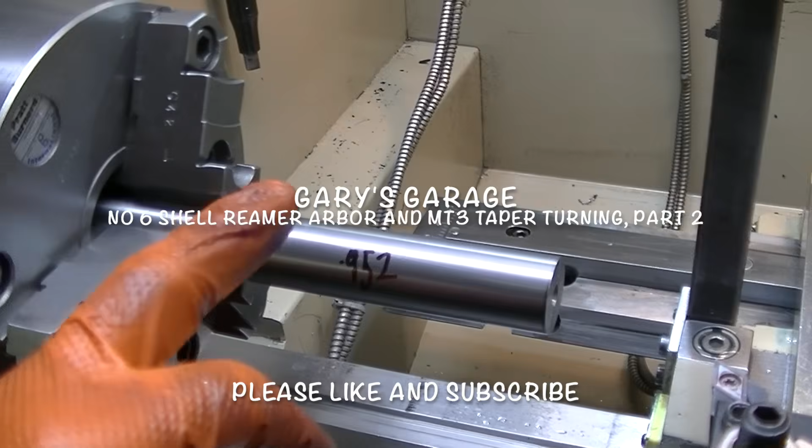Alright, we're back at the lathe now to turn the MT3 taper for this shell reamer shank.

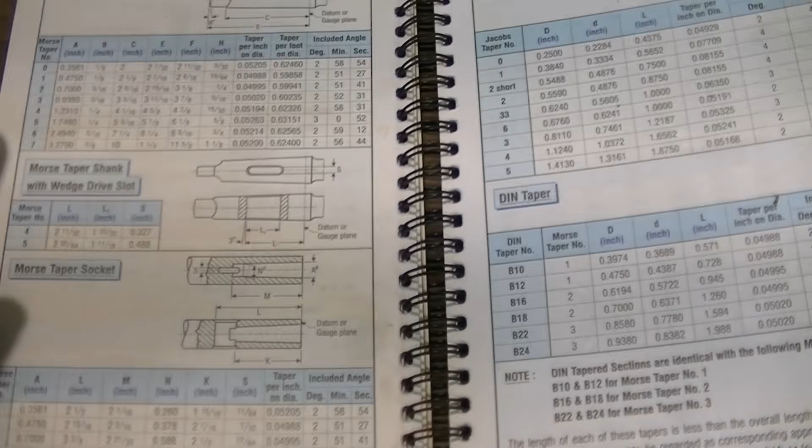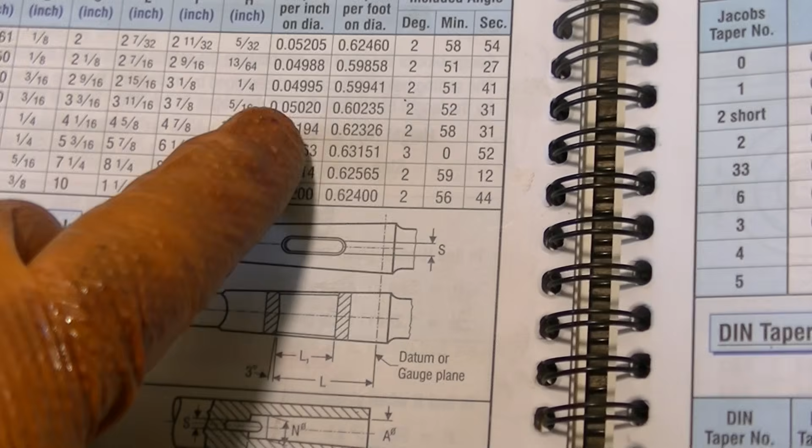Okay, so I think the way to do this is I'm looking up the MT3 taper in the engineering black book, which is like a machinery's handbook but just a condensed version of it. I'm looking at number 3 here, Morse taper 3, and I look over the taper per inch on diameter. I think that's the right number, I'm not sure. It's 50 thou and 2/10.

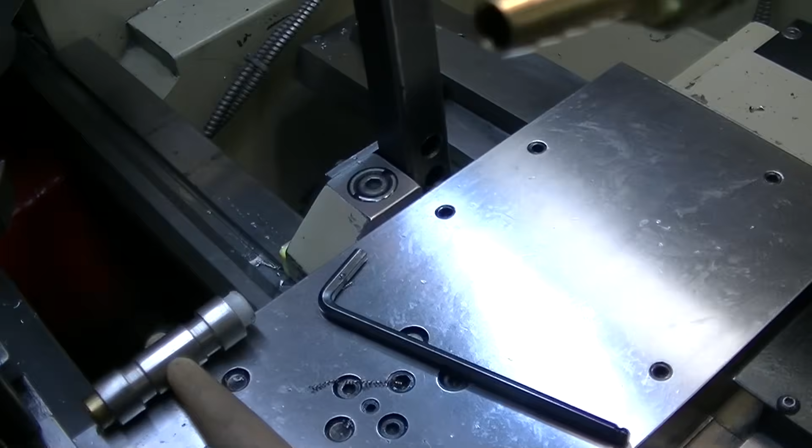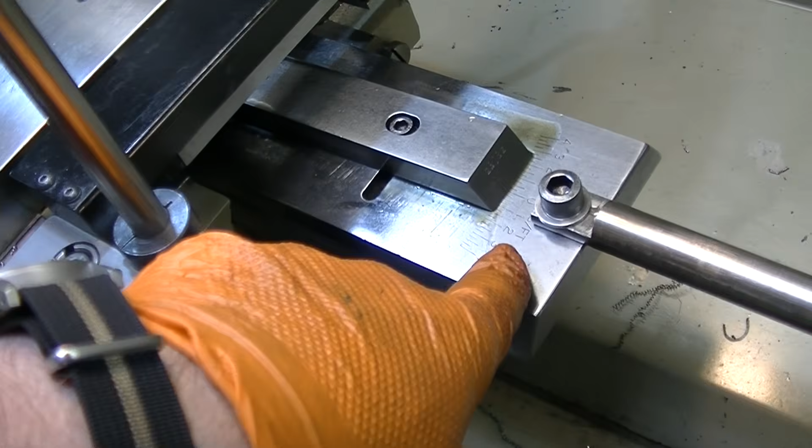So we're going to go over here. The taper attachment is installed. Well, the taper attachment stays installed permanently, but I just set up the tail part of the attachment right there. And I'll move over the cross slide here. I set the angle basically approximately based on the inches per foot. This is just very approximate.

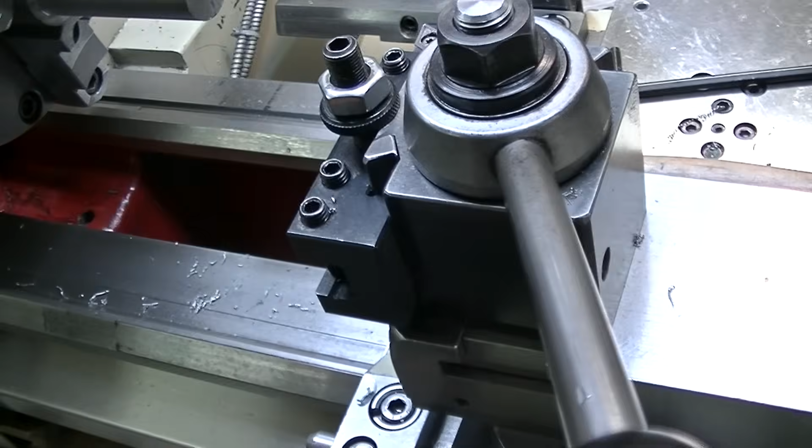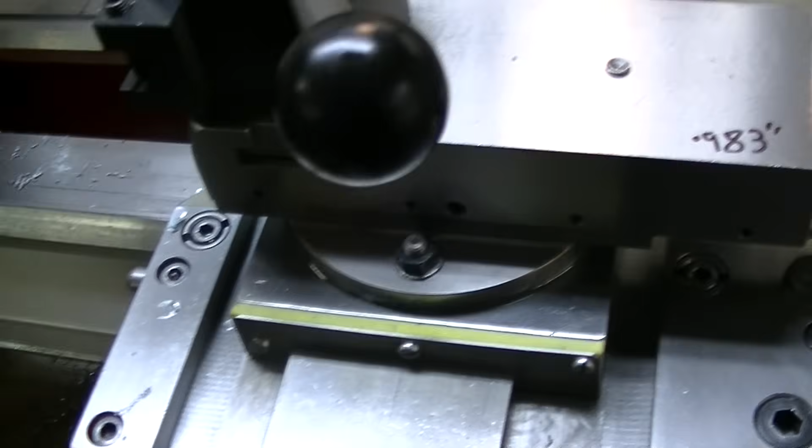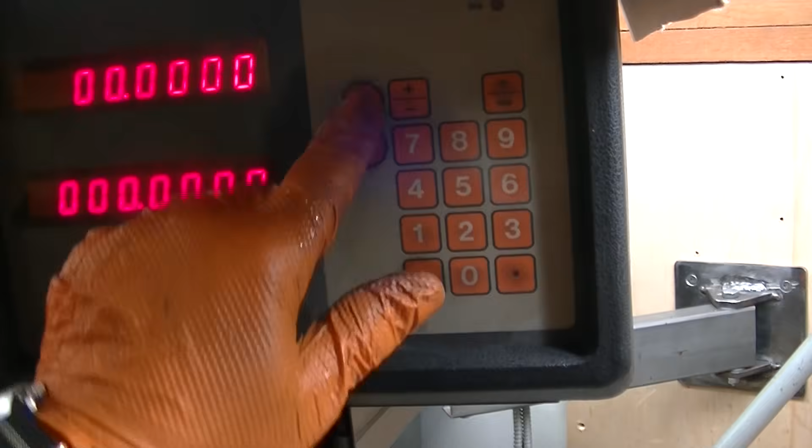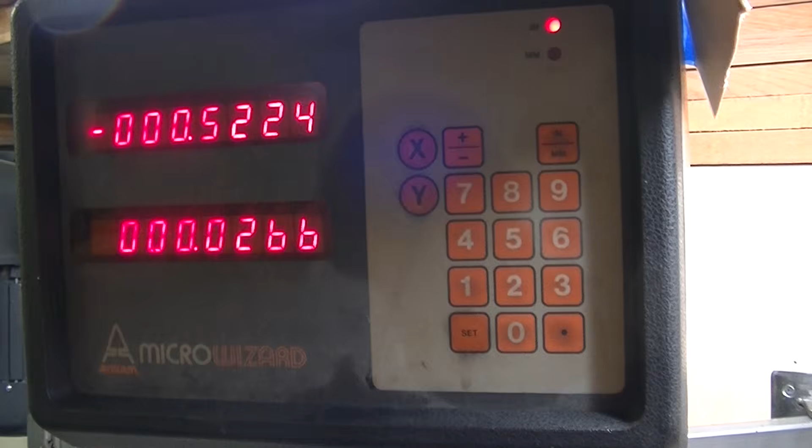And then to get it as close as possible, at least with this machine, I use the DRO, and what I'll do is I'll take the backlash out of the taper attachment. There's a lot of backlash in a taper attachment, which is quite normal. So I move the cross slide over, and I move the X 2 or 3 inches, and then what I do, I zero the DRO, and see if I can do 3 things at the same time here. I'm going to advance X by exactly an inch, and hopefully the Y, I know it's reversed, but hopefully the Y is at 50 thou.

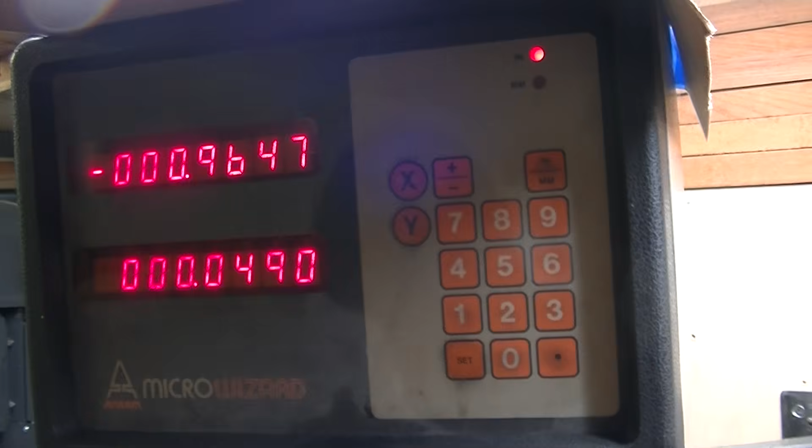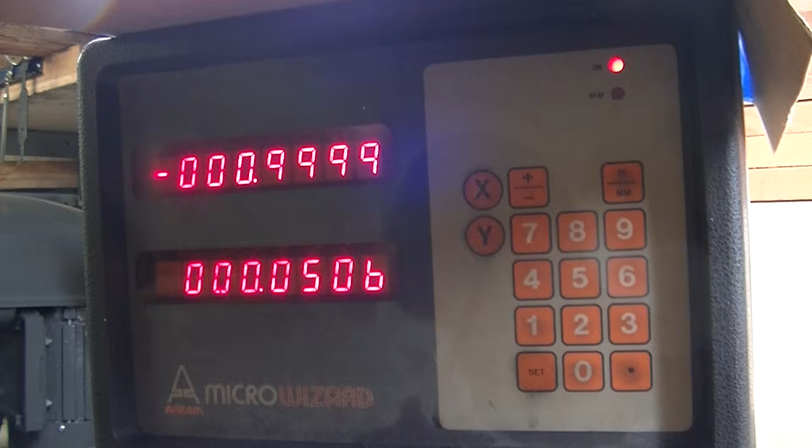So let's see... and there we are, 50 thou and 6/10. So that's as good as you're going to get on a taper attachment like this.

So what I'm going to do is set the camera down and start taking some cuts on a test piece right here, and get a rough idea to see if it's cutting correctly. Okay, let's see if you can see anything here. Get this fired up.

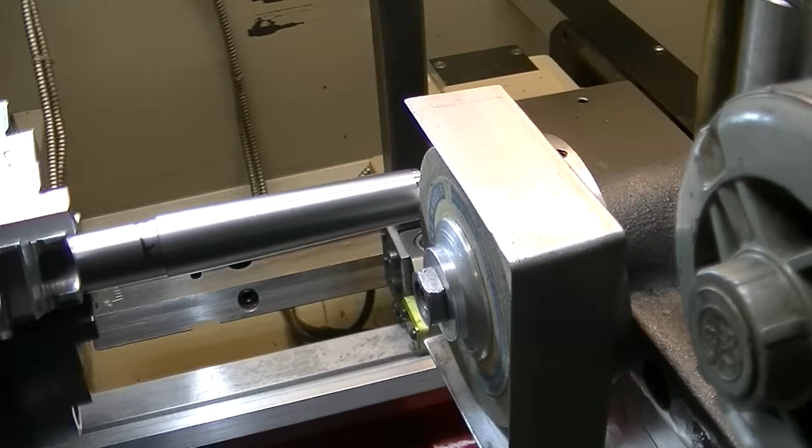Alright, good morning everybody. Back at the lathe here. So I had finished off yesterday by turning down the MT3 shaft, and I thought I just hit it bang on or just slightly under.

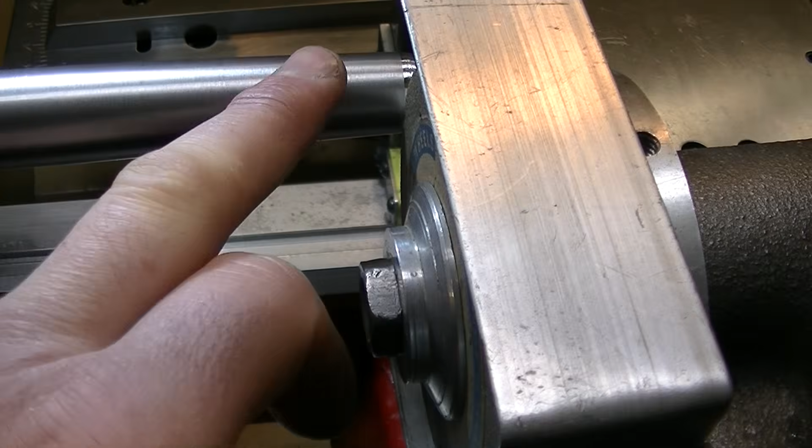Well, it turns out when I slid it into the tailstock over there, looks like I do have a smidgen left. I can't measure because it's taper, but I can grind just a little bit off to make it a perfect fit. So I'm happy about that.

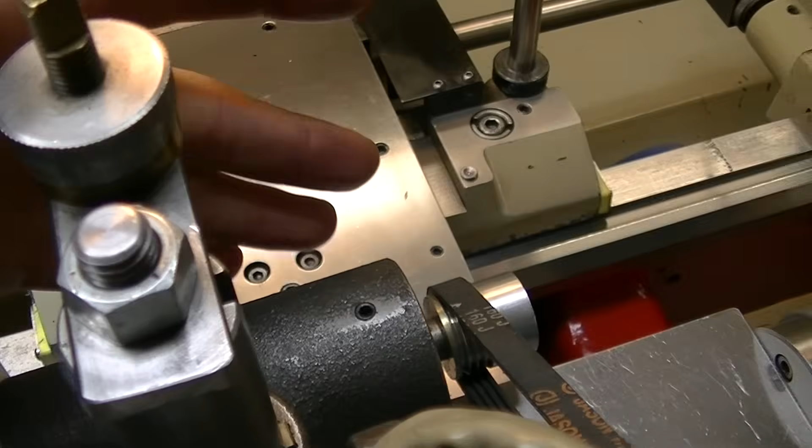The only thing I'm not happy about is because this is on a taper, the tool post grinder is also following that taper, and the barrel of the tool post spindle interferes now with this side of the tailstock, so I cannot support the end of my shaft here. Now I've got a roughly 4-inch extension. That's not really good. So I think the finish won't be as nice as it could be.

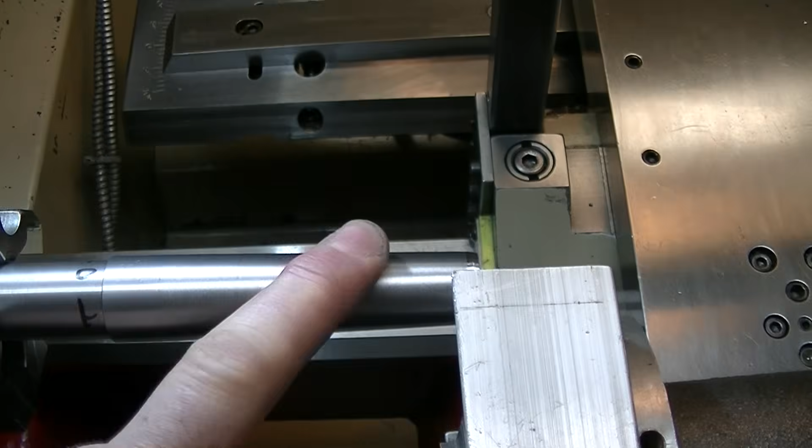But do I go with it? Yeah, sure, I'm going to give it a try anyway. So I'll set you up here and see what happens.

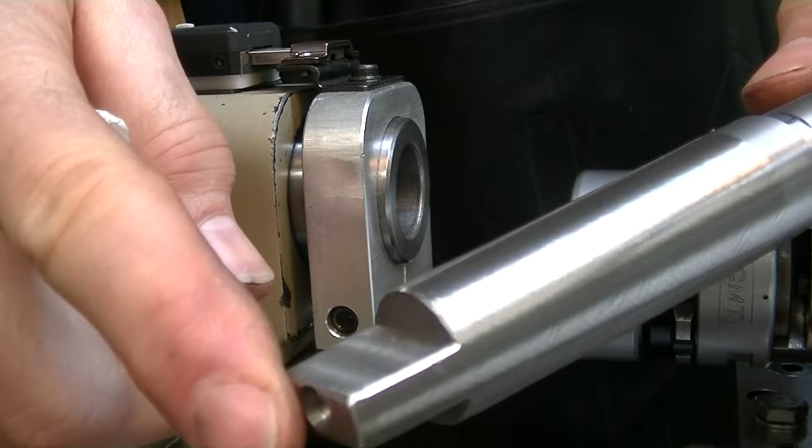Okay, back here, got a tang milled on there. I just copied a drill bit, and it looks like it's correct. So when I stick it in here, if I rotate it, I should find where it locates, and okay, it locates right there, but it doesn't go very deep, which means I can still grind material off, which is good.

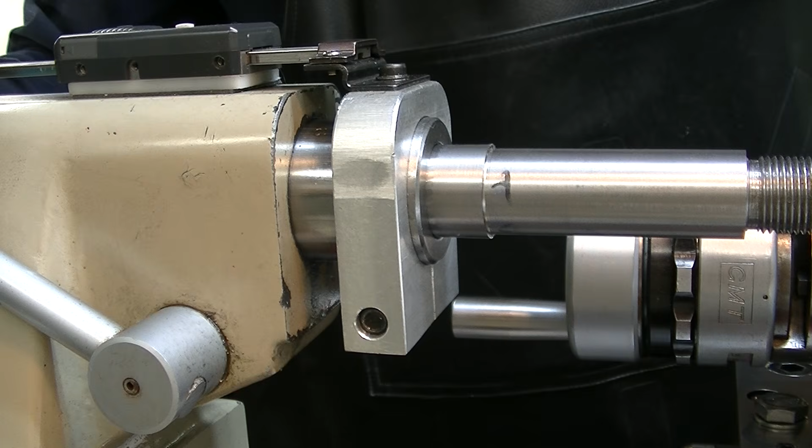Also, if I stick that in, and I've got the tailstock locked, I can try to move this around, but there's no wiggle. So I'm thinking that I got everything good. I just have to keep on working on the grind.

I'm just really disappointed with, I don't know if it shows up on camera, it probably doesn't because it's quite subtle, but that isn't a great finish, and I gotta find a way to support the tailstock with something longer, maybe like a long dead center or something.

That might be worthwhile making for situations where I need to grind something with a tool post that's a relatively small diameter. This end right here is around 700 thou. So the body of the tool, let me turn it around here, maybe you can see, but the body right here of the tool post grinder interferes with the tailstock, so that's the issue. I don't think that's a big problem to solve, but it's something that I'll need to make a tool for. Okay, back to grinding.

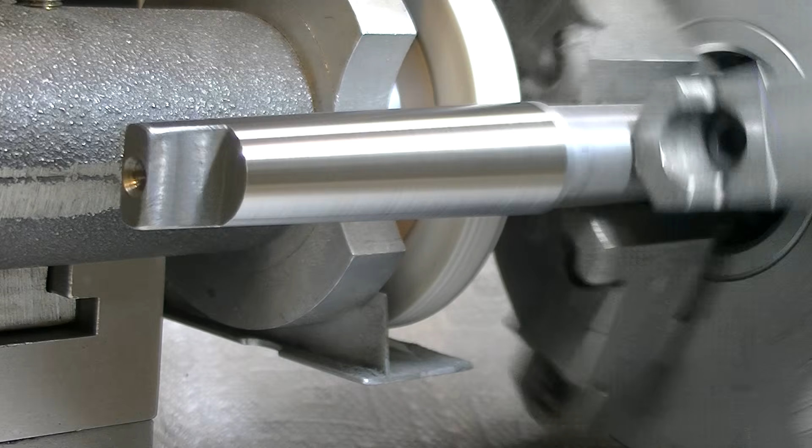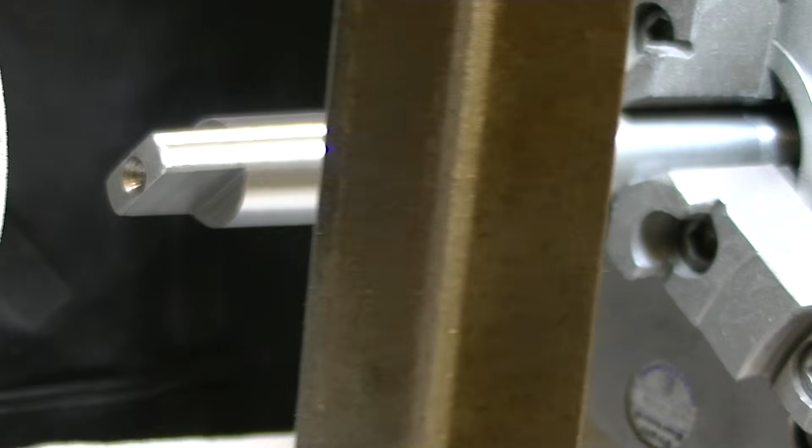Alright, that looks alright. Oops, keep banging that at the end there. Oh, that's really hot. That's one thing I gotta cool this down. It's very, very hot.

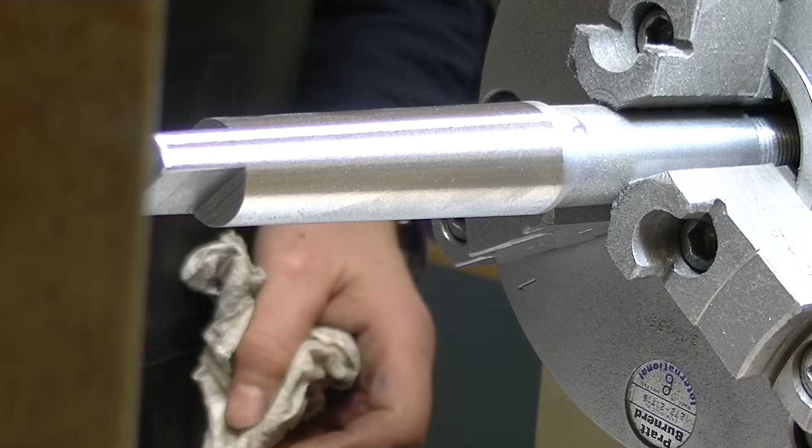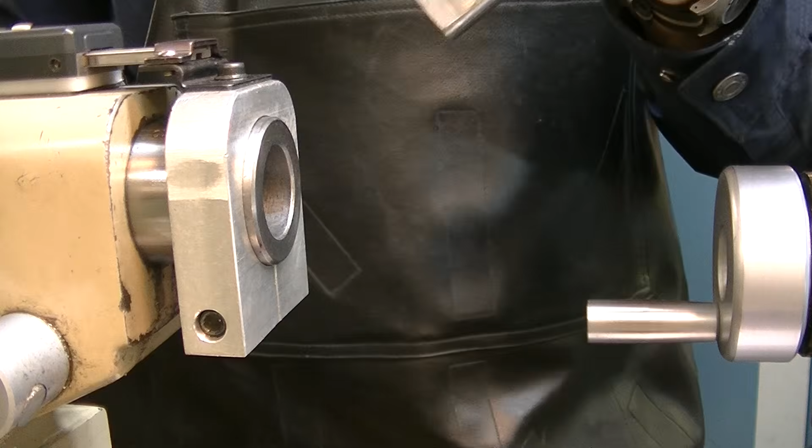Okay, so the quality of the grind this time around is improved quite a bit. Still not perfect, but I'd be very happy if this is where it stayed. Anyway, haven't tried this yet, so let's get this in here.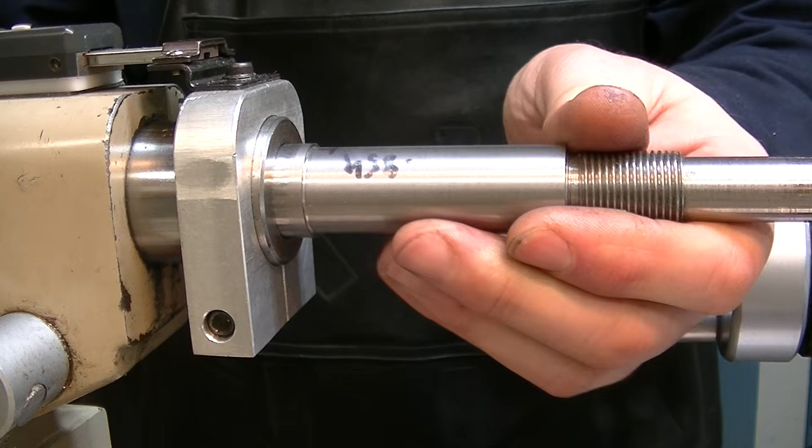Oh, nice, nice, nice. Okay, so the tang, just rotate. Yep, that goes in plenty. A little bit of a shoulder there. That's exactly what you want. That seems to fit just beautifully in there.

I'm not going to bother bluing it. This is not a super precision fit thing. I can tell that this, you know what, I'm just gonna give it a little tap at the end here with a hammer and see if I can get it out by hand. There we go. Lock this. No, there's no way.

No, that's not coming out. Alright, let's see if it pops out. Yep, pops out beautifully. Very happy with that.

So the taper part here is done, and we'll move on to the next part, which is making a keyway whereabouts, right in here, for the sleeve to ride up and down.

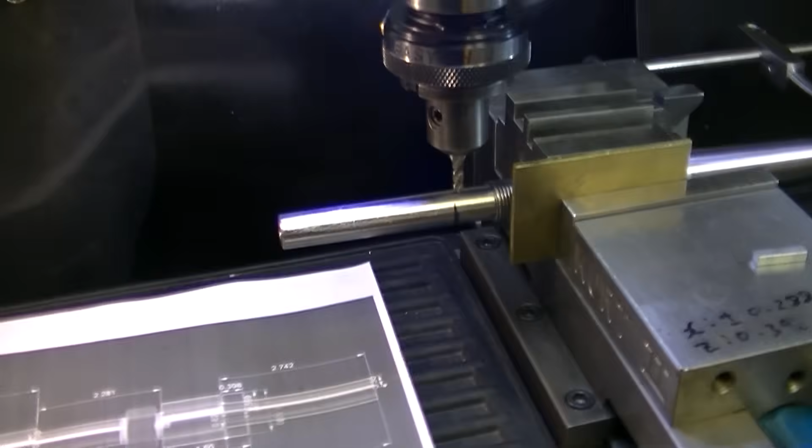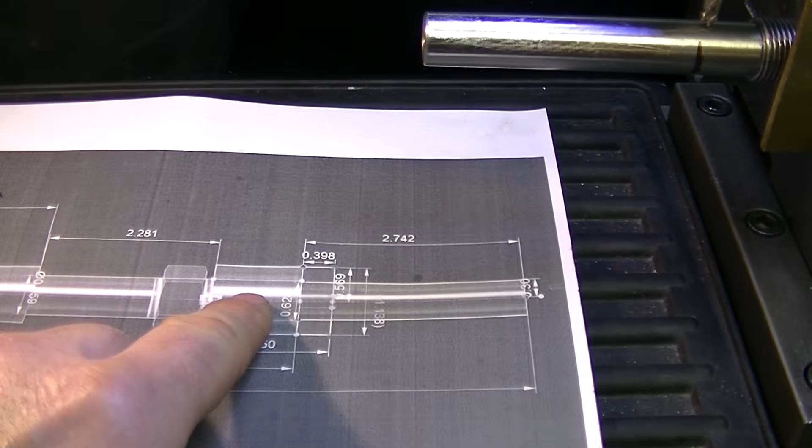Alright, so we're at the mill, and I'm preparing to cut a keyway here. This is the key, it's a 3/16 key, and the plan is to cut a keyway in this section of the shaft, right inside here, so that the sleeve could slide up and down while it engages the shell reamer.

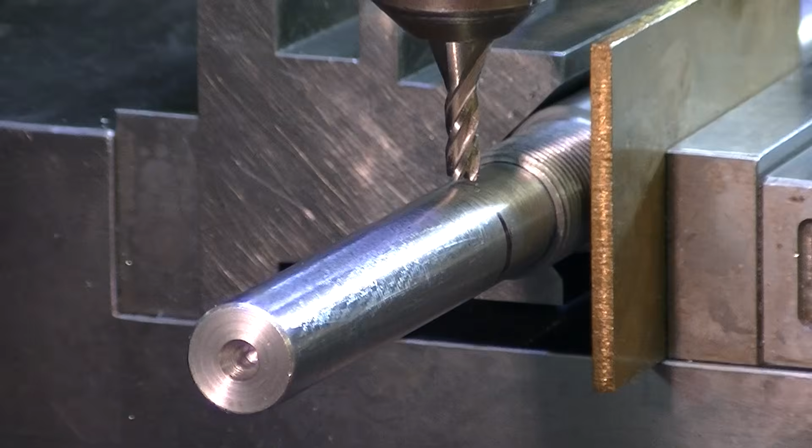All right, we're recording here. That should be good right there. I don't think I'm going to use any mist, it's just a small cut. I'm going to go at 2000 RPM here. That should be it.

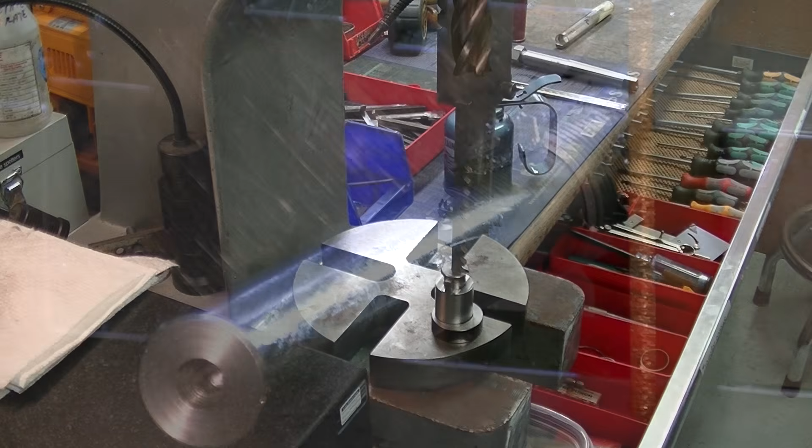Alright, so I got you set up here at the arbor press. I'm just basically doing this right over top of my tray, and I got a little container here to collect the oil and the broach when it drops down. But anyway, hope it's zoomed in enough. Let's check. Yeah, there we go.

That might be it. I'm going to get some, see if I can oil this up right now a little bit. I could tell there's going to be a mess. There we go. Okay, that's oiled. Oil up the broach.

I've never done this, guys. This is the first time ever broaching. Should be interesting if it works. So this one's all set up. Let's go. So far, this is going a lot better.

Hard to do, but it is going. Oh yeah. That is working, I think the other one was dull. Hallelujah, that went through. Okay, gee, nice.

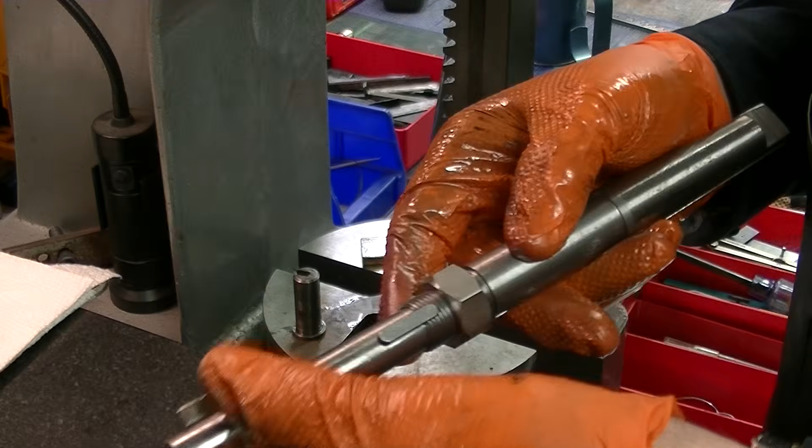Got the keyway. This looks like it should go, but won't be able to tell for sure. Still tight. I wonder if it's just the width of this keyway. I think the depth might be okay, might be just the... Okay, I gotta take my gloves off and do this off camera.

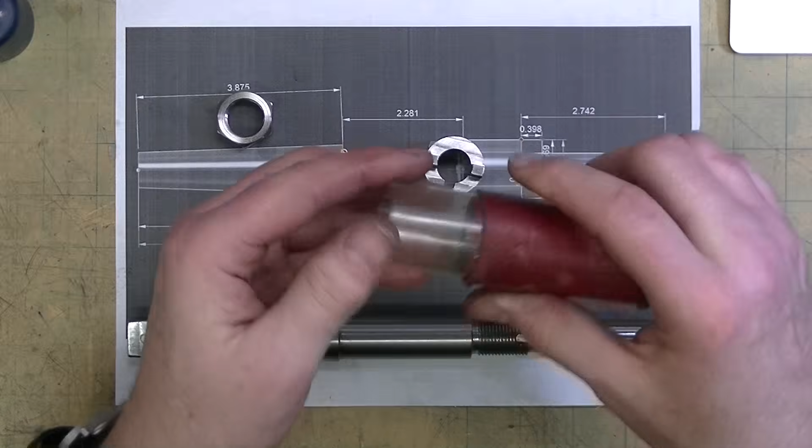It was a project that I didn't really need to do. It was just one of those things where I looked at this shell reamer that I had laying around for years.

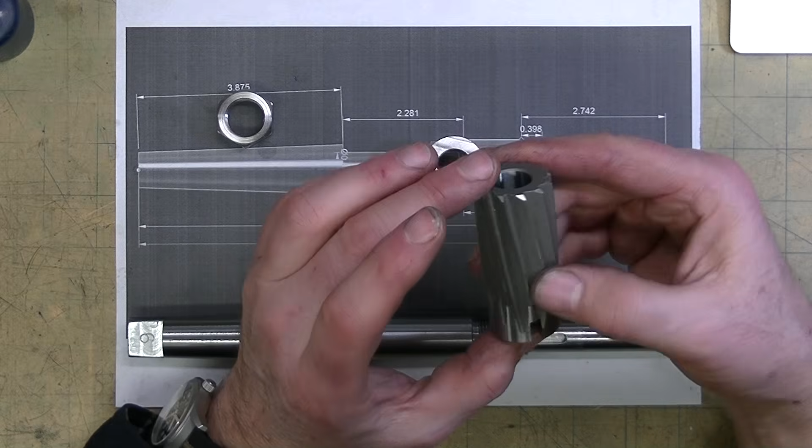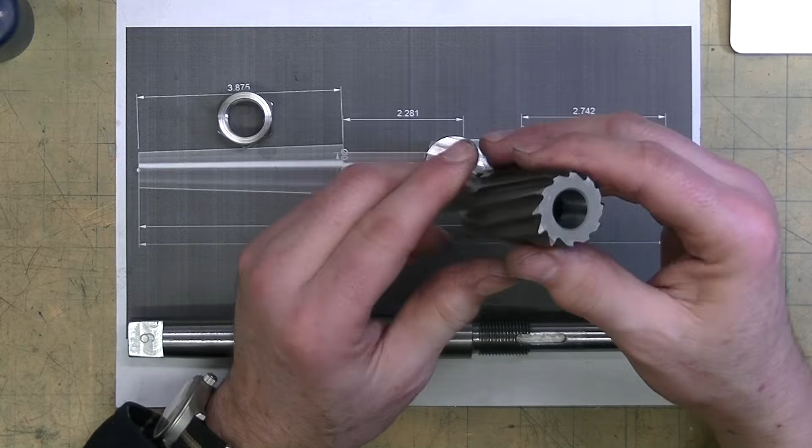And very nice piece of kit. It says, oh, UB. So yeah, UB is Union Butterfield, a very well known reamer and drill bit company. These are super sharp. This thing has never been used, and it's a nice reamer. It's 1.25 inches. I may need it once in my lifetime, who knows, but the thing is, I really don't need this because I actually have other 1.25 and 1.5 reamers that are just all integrated.

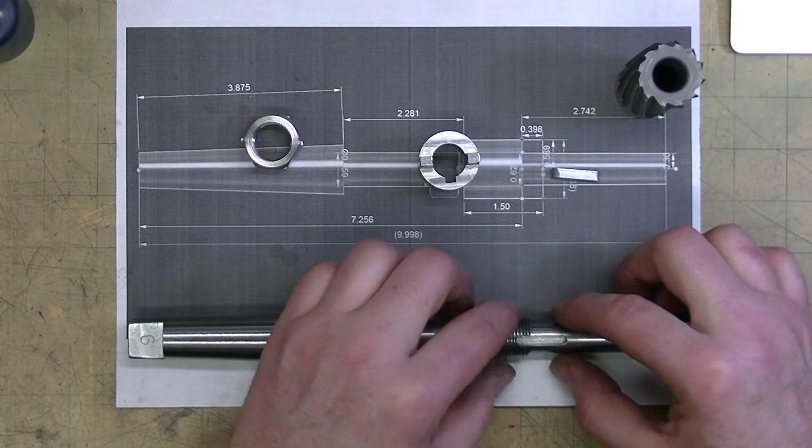So for me, this was a learning project. Can I actually build something and learn something? And I learned a shitload, there's no doubt about it. But the bonus is that I actually ended up making a tool that's usable. It wasn't a half-done project that I ended up throwing away.

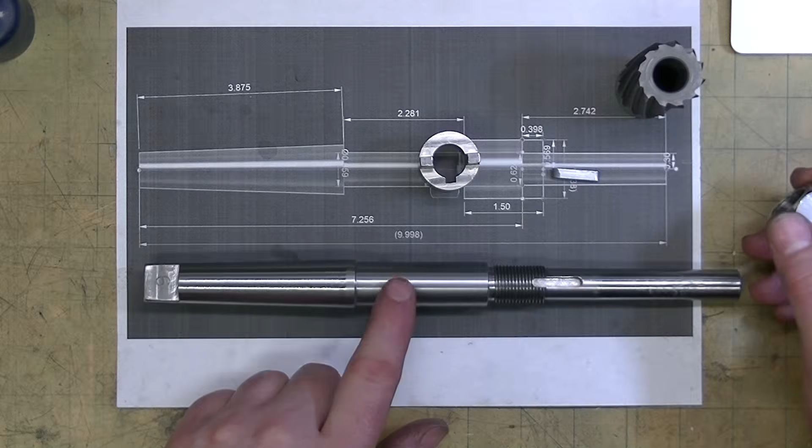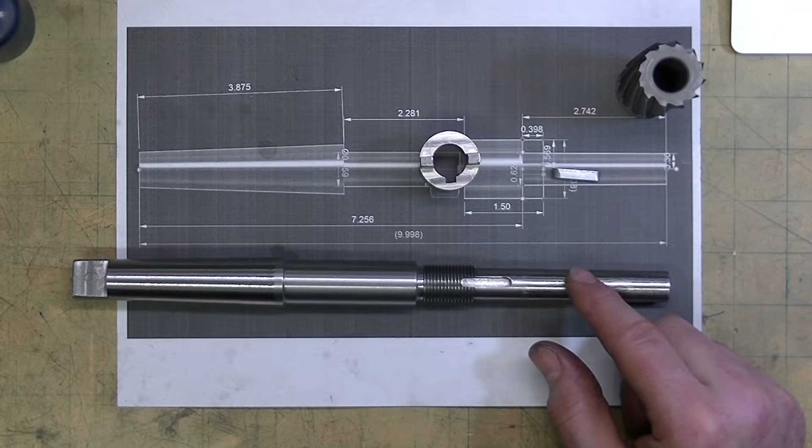It's a number 6 shell reamer arbor, and it's got an MT3 taper here. This is 4140 steel. I will probably case harden this taper right here. I'm not too sure if I would do the same with this guy on the MT3 side, because I don't want that scraping up my tailstock, so I'll probably just do it onto this side right here, and maybe the threads as well too.

And that will keep it from wearing, you know, if this goes on and off. But you know, that'll just be one of those things. I'll have some projects to case harden, and I'll just throw that in the case hardening project.

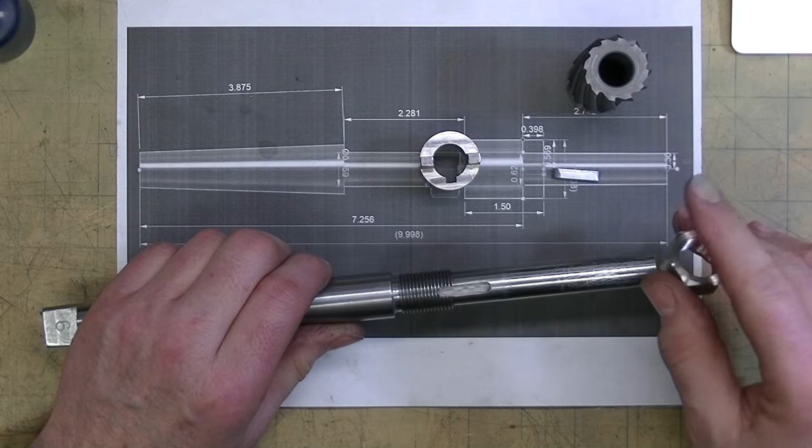So anyway, here's the, oh let's see, there's a shiny side. Yeah, so they're both machined, but the nicer side goes right up against here. The fit of this thread and this nut is absolutely beautiful, it's just such a nice machinist fit. Zero play. It's just fantastic. Anyway, I'm just bragging, just love it.

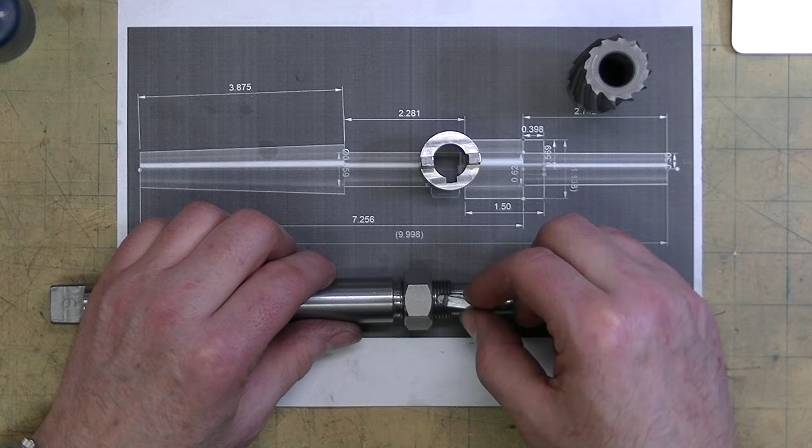Key goes in here, and the sleeve slides over top. This actually worked out great. That was the broaching part of it. Maybe I can bring you in a little closer right there, so you can see that broached through nicely.

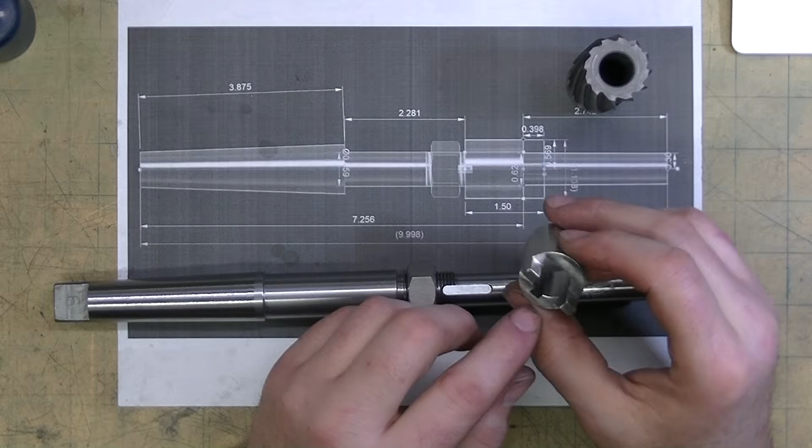First time I ever broached anything. Man, you know, guys, if you've never broached, this was only a 3/16 key, and I have a 3-ton arbor press, that was a beast to get that through. So if I had to do a quarter key, I'd have to go to the hydraulic press, there's no doubt about it.

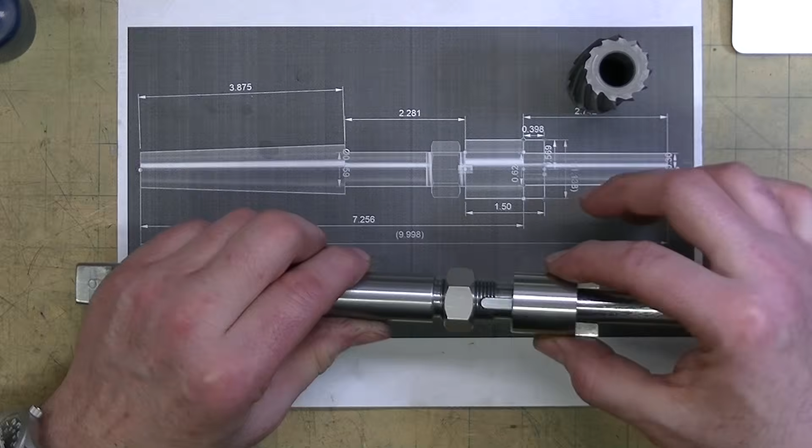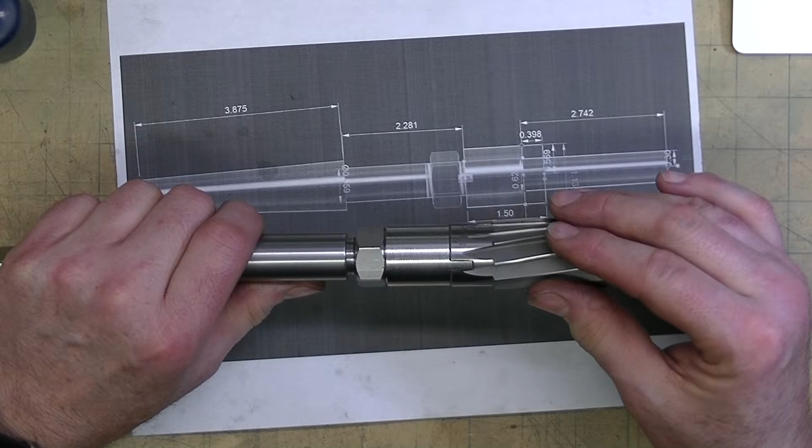There we go, so that slides on there very nicely. And the reamer, there we go. So I just back that off a little bit, push this on real hard onto its taper, and I can leave the gap there, or I can just snug it up. And right now the reamer is set on the tapered arbor.

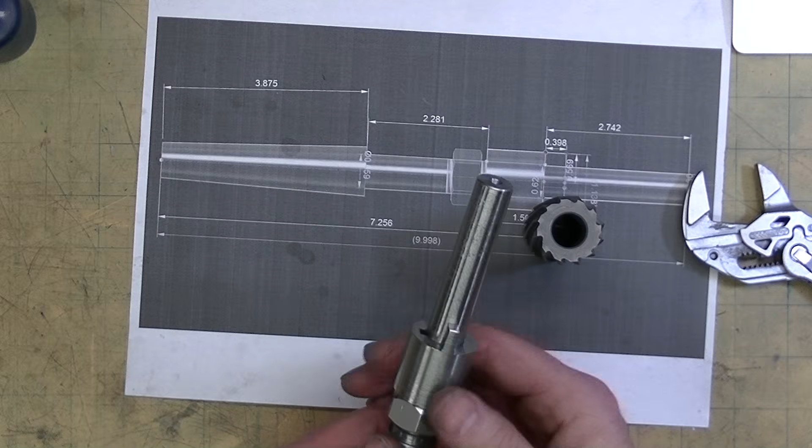And there you go, so that's it. And to take it off, just take a wrench. No, I was able, no I can't. You just give it a turn, and there you go, it releases the reamer. So one more time, back this off, this goes all the way down. In she goes. I can't take that off. There we go, works nicely.

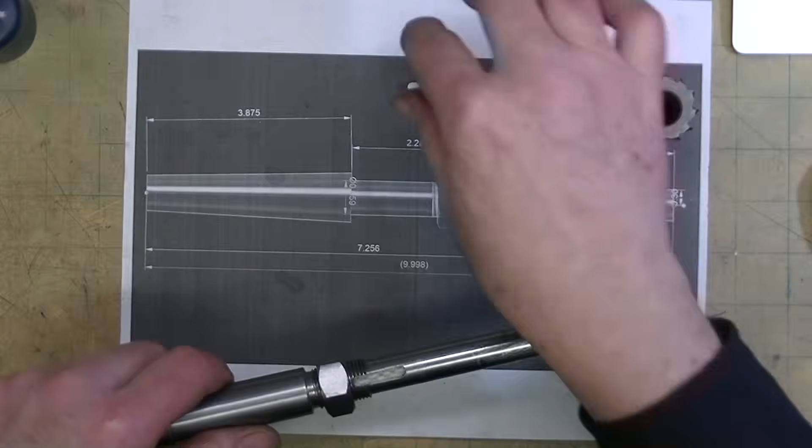Very happy with that. Anyway, one of those projects, I'll never need this thing again, I'm sure, but nice to have done it. Nice to have practiced some machining and stamped it number 6, because apparently that's what this size is. And there you go. So anyway, thanks a lot for coming along for the ride, and we'll see you next time.